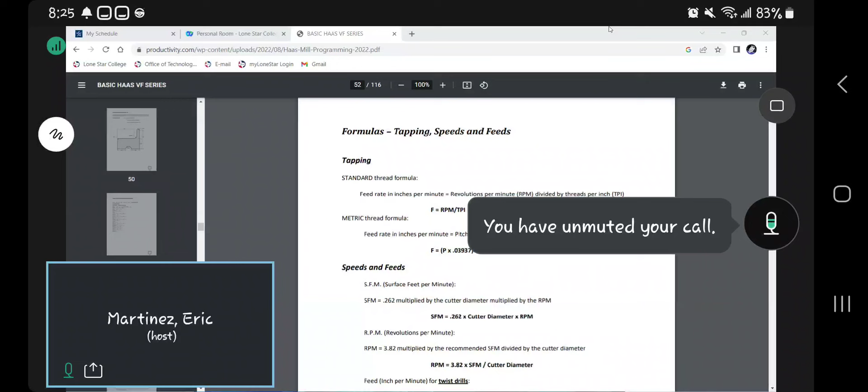It's a lot of information to get absorbed in what, 6 weeks? Yeah, it's bad enough, it's already 6 weeks. And then on top of that, we missed at least 3 or 4 days. So we lost almost a week with all the days off and unforeseen events and holidays. We had Juneteenth, 4th of July, we missed today, and we missed a day last week. We lost a whole week.

But it's all right though, because what do we do in bad situations? We adjust our fighting position and keep on moving, right? We just got to fire, keep on going.

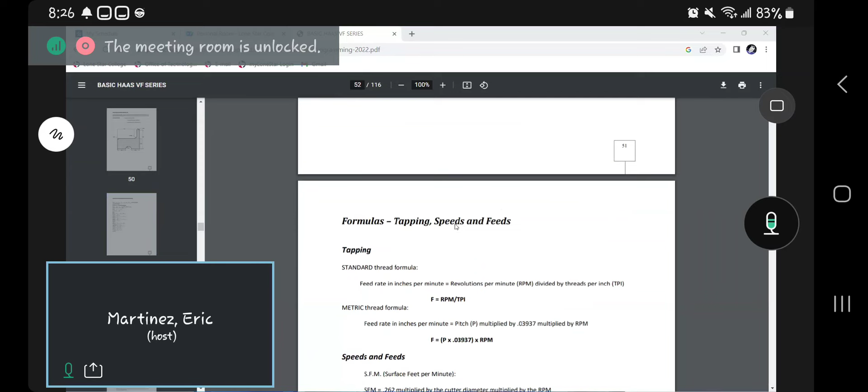All right, so on page 52 of the mill, if you don't have it opened up, open it up on your personal computer. We're gonna go to Haas productivity, and it's gonna be the one in the middle. It has to say basic up here on the top left. Basic Haas VF series. That's how we know we have the right one.

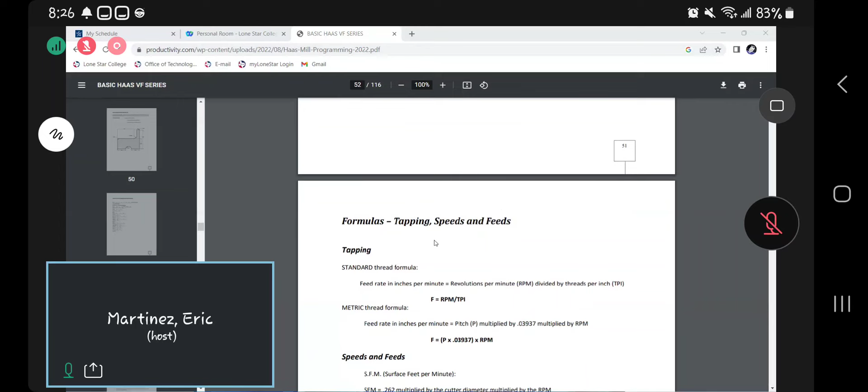Are we there? There.

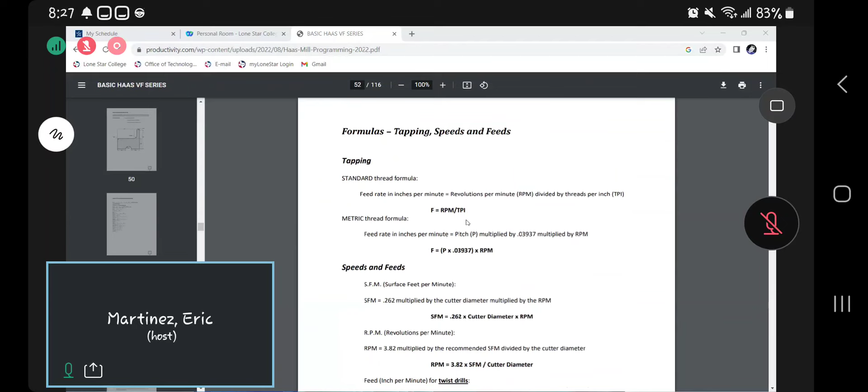Okay, so on this page 52, all right guys, we're supposed to know this information already from Basic Machine Shop, correct? Tapping, our feed rate equals our revolutions, RPM, divided by our TPI, correct? So that's our feed rate. So we got to figure out our RPMs first, correct? And then we got to figure out TPI. How do we figure out TPI?

How do we figure out TPI? Man, I can't see you, so I can't call on you or pick on you. Should be on the print. Okay, hold on, you're confusing yourselves.

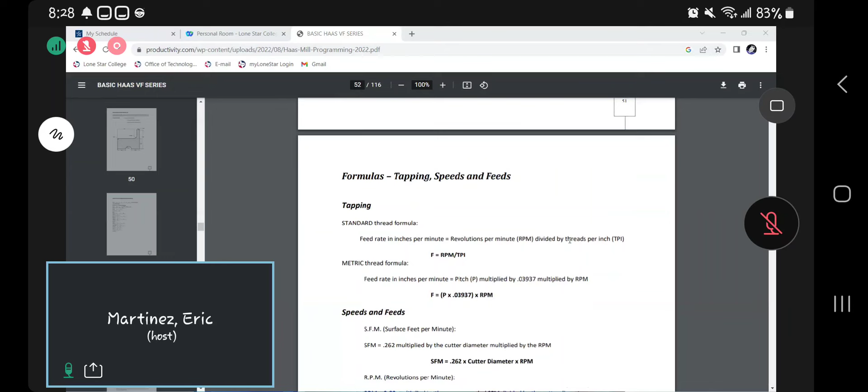All right, so if we got 8 TPI, correct? 8 threads per inch, 1 divided by 8, that would give you your TPI. So the RPMs divided by your TPI, our speeds and feeds, right?

So our SFM is our surface feet per minute. That depends on what material we have, correct? Are we dealing with stainless steel? Are we dealing with titanium? And then what type of insert are we using, or what type of end mill? Are we using a carbide end mill? Are we using high-speed steel, correct? So we figure out our surface feet per minute.

So our surface feet per minute, right here would say if it's 0.262 times your cutter diameter times your RPMs. But that's for SFM. So if we have our SFM, though, and want to figure out our RPM, it's the same formula as we learned from basic. 3.82 stays as a constant, correct? 3.82 times your surface feet per minute divided by your cutter diameter.

So if we're facing on that Haas, it's 3 inches, correct? Because we have a 3-inch face mill, right? So 3.82 times surface feet per minute - like we said, our surface feet per minute all depends on what material we're cutting and what inserts we're using, for example of the face mill - and then divided by 3.

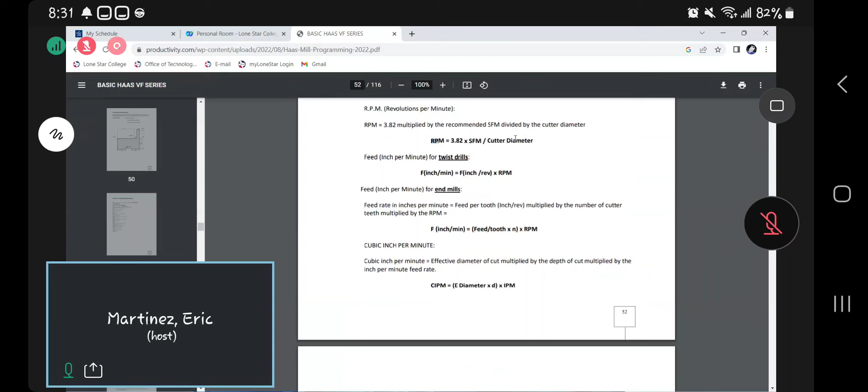So this is the feed per tooth, it's gonna say like feed per tooth, 0.003, 0.002, those type of numbers, right? That's what you're gonna get on the identification of the tool, divided by the tooth. So if I'm using a face mill, I have 8 teeth on there, right, because I have 8 inserts. You divide it amongst each other, then you multiply it times your RPM that you got up here, correct? And then that's how you figure out your feed.

All right, drilling and tapping and boring canned cycles. This is basically just explaining how canned cycles helps you produce less G code than what you would line by line. Does that make sense? So for example, if I wanted to peck...

And just look at my mouse real quick. If I came over here and started pecking down, right? If I'm doing peck, that means you go in and then you come back out. You go in and you come back out. What are some of the reasons do you guys think that you want to use pecking?

Your harder metals need to remove some chips. Why? While you're drilling and the chips stay down there, those excess chips create friction. That friction creates heat, correct?

If you're not using coolant, or if your coolant isn't strong enough and you're going to town at it, you could weld your end mill to your actual part.

So pecking allows the drill to come out of the hole, so coolant goes in there, and then the shavings get pushed out, but it also cools the hole while the drill is coming out. Plus, with your drill coming back up, it doesn't have as much friction. It has like a little pause through the friction.

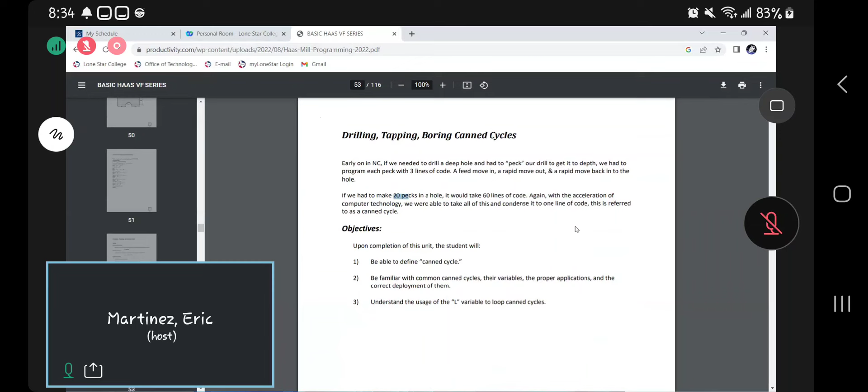That's what it's saying right here - it would take 60 lines of code if you only had 20 pecks. So if we're doing a big massive part that's long, and that hole is 5 inches deep, how long would that program be? Pretty long, right? So we're gonna learn what canned cycles do, and we're gonna understand the value of L also.

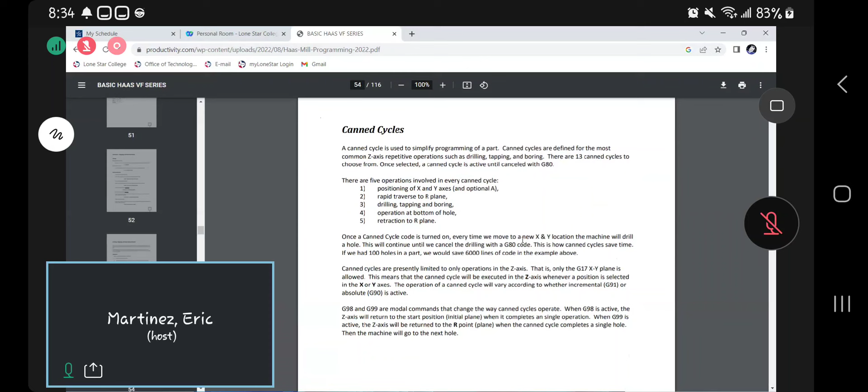So canned cycles - I could read this and you guys could be like, what did you just read? Or I could just explain it to you.

So there are 5 operations: positioning of X and Y - we know what that is, the X and Y plane. Rapid traverse, R - R means after you drill, you come back up to your R plane, your clearance. Most cases, it's 100 thousandths. So you drill, then clearance back up to 100 thousandths, correct?

Then we're gonna drill, tap, bore - an operation on the bottom of the hole - and then the R is gonna retract to that plane again.

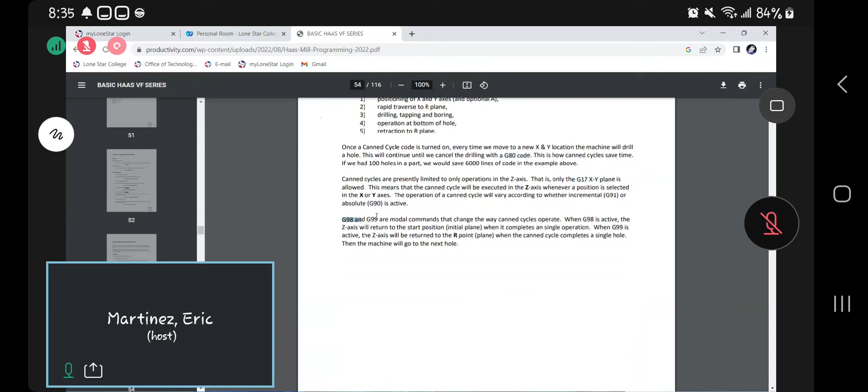All right, so we're still working on a G17 X and Y plane. A G80 will cancel your canned cycle. We're not gonna go over G80, G98, or G99 really, because it's just gonna confuse you a little bit more.

So these are your canned cycles used on the VF series of the mill. We have G73, G74, G76, G77, G81, G82, G83, G84, G85, G86, G87, G88, and G89.

So if we look over here, here's what it actually does. A G73 is a high-speed pecking drill. A G74 is a left-handed tap. G76 is fine boring, G77 is back boring. G81 is spot drilling, G82 is counter boring. G83 is peck drilling, G84 is a tapping cycle.

G85 is boring - all of these say boring, but some of these boring cycles bore down, stop, then wrap it up, or they start at the bottom and work their way up. That's why we have so many boring cycles.

Now, we're just gonna go over the ones that we really use in the shop - the ones that are gonna be your bread and butter. Obviously, we have about 12 or 15 of these, but if we spend time going through every single one, we're gonna waste a whole day just learning what they do versus how they work.

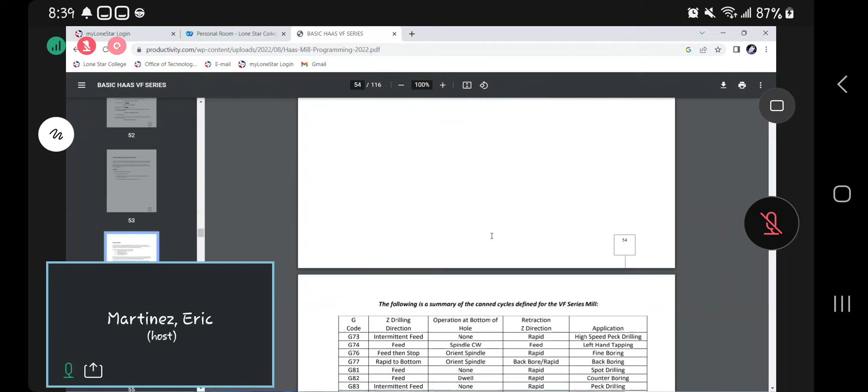Does that make sense? All right, so G80 is to cancel your canned cycle. In addition to this, a G00 or G01 code can also cancel any canned cycle. So I know a lot of you are going to read that and say, well, I just got to put a G00 or G01 in, it's going to cancel it. Yes, it is. But normally, if you use any type of canned cycle, anything between a G73 to a G89, at the end of your program you want to have a G80, so that you're telling the computer, hey, I'm canceling this, I'm done, don't use it anymore.

This is the way it's used out there in the industry. I know a lot of you are reading the book and thinking you could do this or that, trying to find shortcuts. But the way I'm teaching you is the way you're going to see it out there in the industry, and most of these guys are used to running code like that for years. So if you try those little shortcuts that are meaningful but not that meaningful, and you try to break the cycle of what everybody's been doing for so many years just because you figured it out on your own, no, don't waste your time on doing those little things.

Waste your time more on focusing how to do it correctly, because we saw how our test went yesterday. So the way I'm showing you guys, it works, it's functional, and it's fast. If there's a faster way to do it, you're only going to shave not even 1 or 2 seconds, but you might confuse yourself even more than it helps you. So the way I'm showing you how to program this layout, please learn it that way, because this is the way you're going to use it out there in the real world if you work for a machine shop.

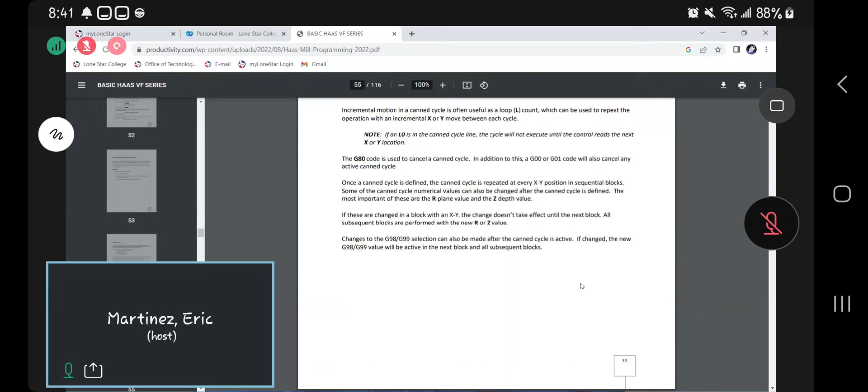All right, so now, as we said before, the R is going to bring you back to your plane, and your Z is going to be your Z depth value. So a G80 cancels your canned cycle. So we're going to start right now with a simple program. Is everybody good? Is everybody tracking?

Okay, yep, I know I'm going a little bit fast, guys, but hopefully we're recording this and you guys could watch it again if you didn't understand something. Be writing down.

What happened? Yeah, so Corey's recording, guys. So if this doesn't upload, if I say, hey, I'm sorry, I don't know what happened, it didn't upload, just send Corey an email. And Corey, please check your emails or get in touch with somebody that has Corey's number and ask him if he could send you that. Pay him through PayPal, Zelle. Pretty sure he takes his OnlyFans pages, whatever. So, no, do not put this on YouTube.

Okay, so we're going to go ahead and do the G81 canned cycle. This is a straight drilling, guys, with no peck at all, just drills going down and then comes back up. That's it. You could use this canned cycle, it's modal. What does modal mean? Modal means once I identify this line, the G81, all I have to do is put a different point value, and it's going to continue doing that can cycle. Does that make sense?

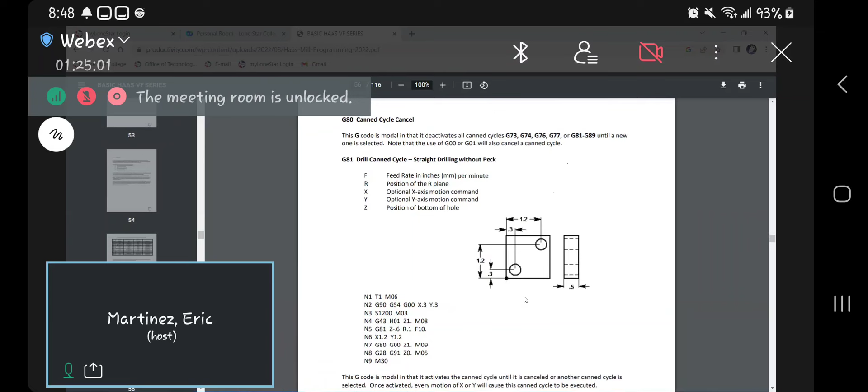All right, so we went down to Z negative 0.6, right? We retracted back up 100 thousandths, correct? Now this is what it means by modal.

My next line, I just have to put my next hole's points in the coordinate system. That's it. So I have to tell it X 1.2, right, Y 1.2. So when it gets down here, it's gonna move to that location. And guess what, guys? It's gonna do this again.

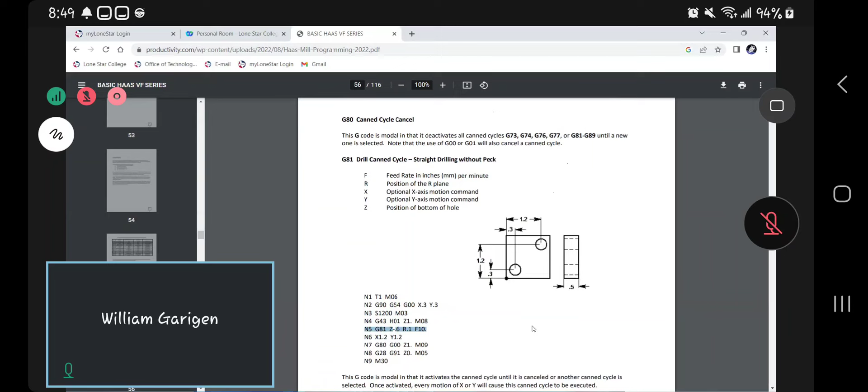Does that make sense? So that G81 line is what's telling when you go down to the next block, the X 1.2, telling it what to do when it gets there. Yeah, that's what they mean by modal. Got it. So instead of you having to write that whole code again in a separate block or anything else, all you have to do is give it the points.

Now, it has its pros and it has its cons, right? Pro is if you have multiple holes, all you have to do is put multiple points, and it's gonna drill them to that Z specification. But that's also the con.

If you have the same hole and the same drill diameter, but you have different Z depths, it's not going to work because you're only giving it one Z depth here. Does that make sense? Because the programming always goes back to the last G code, right? It comes back up to this one, yes. So your canned cycle, whatever point you put down here, it's going to come back up to this canned cycle, until you tell it, hey, that's it, no more, by giving it a G80.

We tracking? Yeah. Let's say there's one here and one here, right?

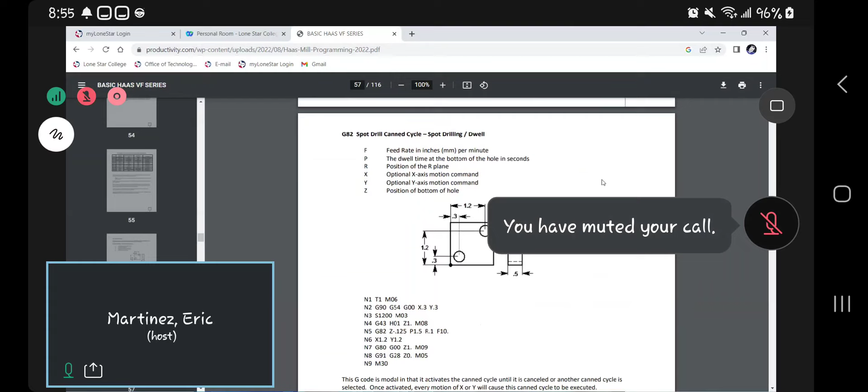Okay, so a G82, very similar to a G81, but it's called a spot drill canned cycle. So what's the difference between this one and the straight drill? What's one of the things you guys see different? Look at the program. What do y'all see different?

G82 code. Yeah, so obviously, guys, and a feed rate, yeah, they're not gonna make two codes that do the same exact thing, right? So the difference between the G81 and the G82 is this P value.

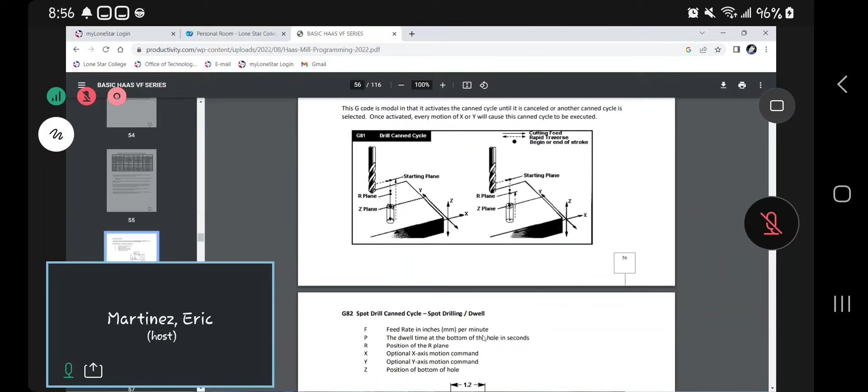You guys see that? Up here, we don't have a P. Yeah, I see that, P1.5. Yeah, but down here we have a P. So what does a P do? Well, right here it explains it, right? The dwell time at the bottom of the hole in seconds, right? So what does that mean?

If I'm spot drilling, just imagine on the manual mill, guys. If I'm spot drilling so I could put a bigger drill in and make a bigger hole afterwards, correct? If I just push down on the Z lever and go down, and as soon as I hit my Z point, I'll pop it right back up. What could happen with that hole? It's gonna leave like a line, right? Because I came off of it abruptly.

So the drill wasn't able to turn all the way with the two flutes that it has, so it left a line in one of them. So what happens on the side of the walls? It left a line. So what happens when your drill comes in? If it catches that line and puts it on a slight angle while we're drilling down a hole, it's going to end up walking, correct?

So what does a G82 do? It gives you dwell time, so it stays down there a few seconds and cleans up those walls smoothly. Does that make sense? So that way, when that drill comes in, there is no line, there is no burr, there's nothing on the walls, and it catches straight on the angles that the spot drill made. So the angles of the drill are going to land right on them also, and that way you have less chance or risk of your drill walking on you. Does that make sense?

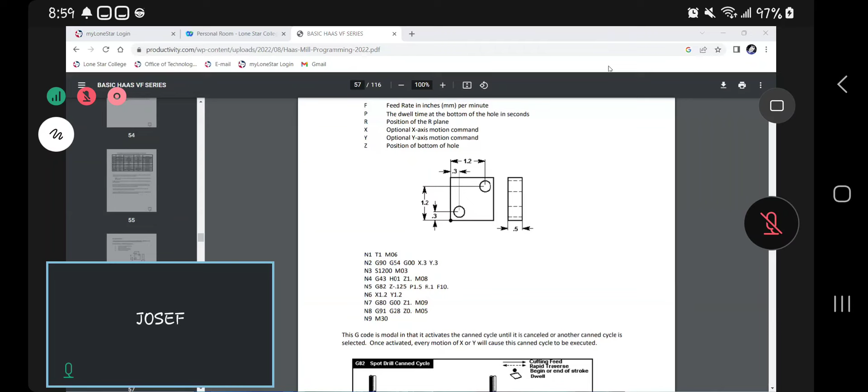You guys see that? Yes, sir. We have a problem with the connector. Huh? Boy, I tell you, man. Hey, text him and tell him - let him call and I will help you to connect. Huh? What did you say, Josef? I'll call him and I will help him connect to the meeting. Boy, he better go to church this weekend, that's all I gotta say. He was already there, so he knows how to connect. Yeah, he came in and left. I think he thought, oh man, maybe if I go on he's not going to notice. Hey, somebody text him and tell him to get back on. All right.

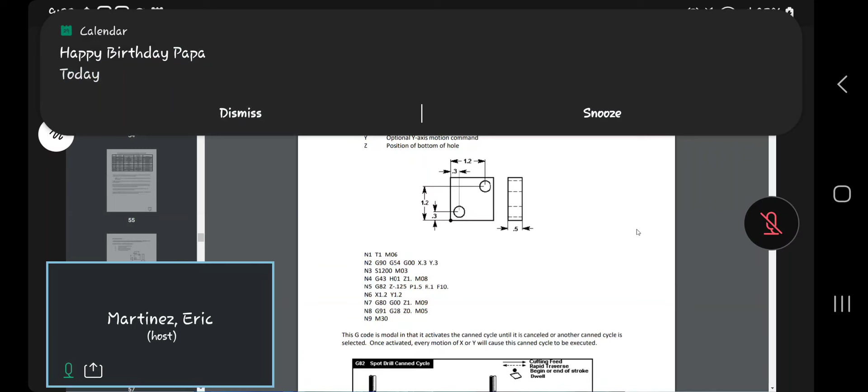So we look at this code, guys, right? Learning how to write code, the best way to do it is to understand it, to understand what we're doing when we're writing the code. That's the best way. It's not by remembering exactly what letter we put where or anything like that. No, it's understanding the process. That's the best way to understand it.

So we have a tool number - obviously we need to have a tool number, correct? Then we have an M06, we need to have a tool change. Obviously, guys, by the time we get to drilling, we've already faced the part minimum, so we're not going to use that 3-inch face mill to drill a hole. If you do, you're drilling a big ass hole - you're drilling a 3-inch hole minimum. So that's why we still put those M06s on, so a T1 M06, right?

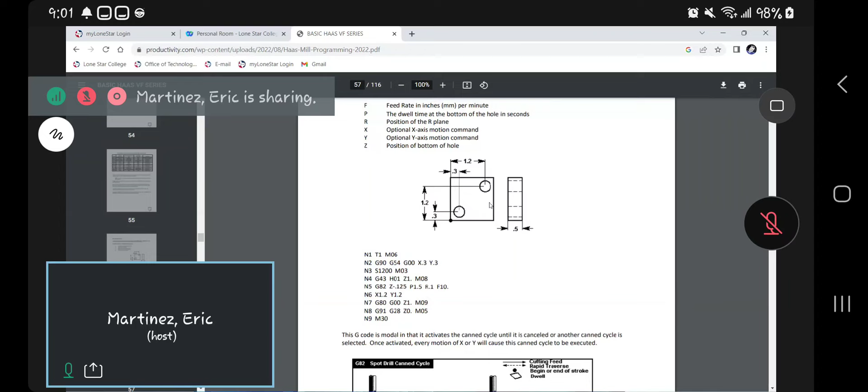So we got our G90 - this is the mill, guys, we need to tell it whether it's absolute or incremental, correct? Then we have our G54. We've established our G54 either before or after we wrote the program, but we need to establish our G54 before we run our part. Like I said, for your test, I don't care if you write the program first, I don't care if you touch off X or Y zero first, but as long as you do it before you run the program, you're good. This isn't my way or the highway, no, it's what works, correct? So we have our G90, our G54, our G00.

We're coming to the first hole right here: X.3, Y.3, correct? So right now we're hovering above our first hole. Our Z should still be all the way up. Then we start our spindle at 1200, M03. We make sure the actual computer knows the tool length, so we give it the G43, which always pairs with your H, and that H has to match up with your tool number. Then we have a Z that goes down to 1 inch above the part. Obviously we were under G00 before, so it's still going to rapid to this position, correct?

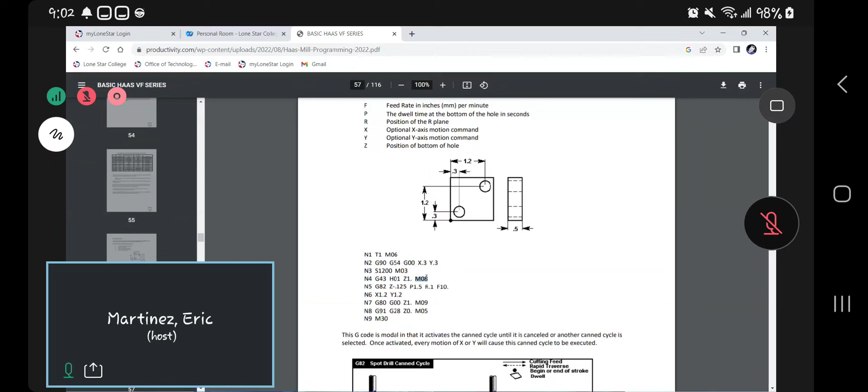So then we had on our coolant, but we're not going to do that ourselves, right? With this G82 canned cycle, you don't need a G01. Does that make sense? That canned cycle tells it that it's going to be a linear cut, so you don't need to put, obviously you don't see a G01 here, Z negative, whatever. We have a G82.

So it's a G82, which is a spot drill canned cycle. We're going to a depth of 125 thousandths. If you guys remember from Basic Machine Shop, whenever you had your countersink drill, it looked like it went down, then had a sharp point, then came up, and had an angle on it. You need to make sure it goes down at least to the angle. If we were in class, I would have drawn this on the board, but we got to work with what we have. That's how we know how deep we're going with the spot drill.

Now, spot drills come in different sizes. They come in different numbers: 1, 2, 3, 4, 5, 6. The higher the number, the bigger the spot drill. So in this case, we're going 125 thousandths into the part, so it's Z negative 125.

Then we have our P value. That P value leaves it down there for a second and a half, cleaning up the walls, then it goes back up to R.1. Your feed rate is 10 inches per minute. After it does that, it's going to go to your next hole on X 1.2, Y 1.2, and it's going to repeat this process again because it's modal, correct?

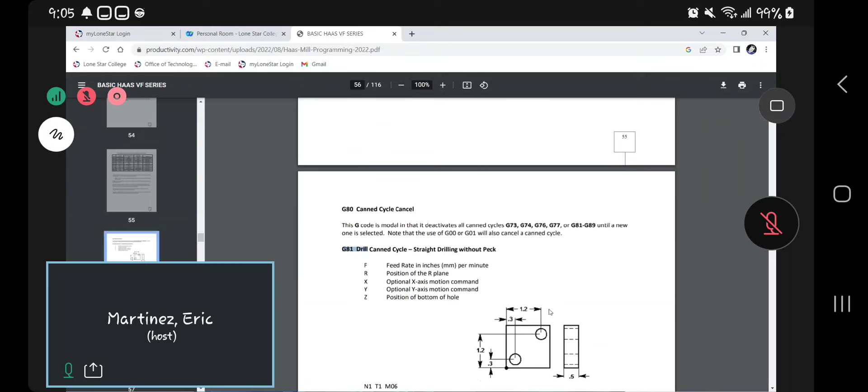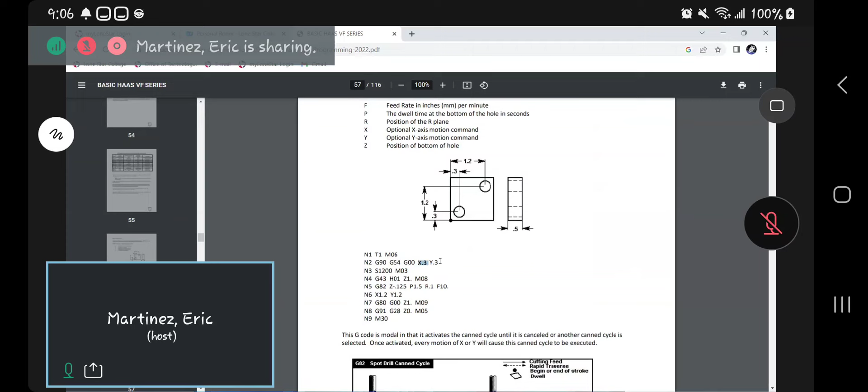Does that make sense? We could copy and paste this all day long, but as we mentioned yesterday, if I copy and paste this, go through the whole program again and understand what numbers you got to change. So if I made this first and then I wanted to come back and just drill, most likely if I copy this program, so it could be the next operation. For my next operation, I'm going to have to change my tool number, I'm going to have to change the T. This X.3, Y.3 is going to stay the same because I just spot drilled those holes.

So now I'm going to come in with the drill and drill those holes. So that's going to remain the same. If I work out my math, I figure out my speed. I need my G43. I need to change that H to whatever tool number I have in the machine now. If it's tool number 2, fine. That H needs to match that T though, so that would be T2, H2. I still need to come an inch above the part.

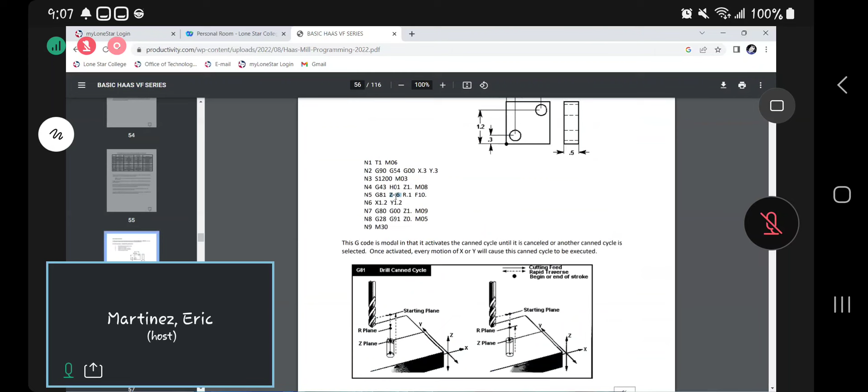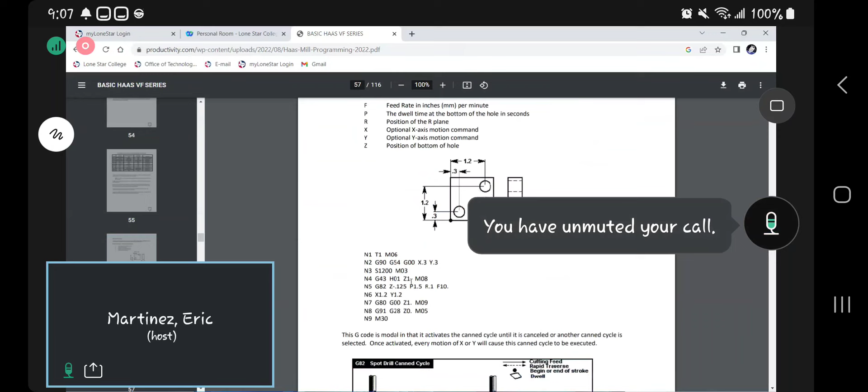And now this G82, I'm going to change that to a G81, correct? And then I will change this Z depth value to whatever I'm drilling at. So let's just say in this case, I was drilling to a Z negative 0.6. The P, well, we have a P value here, but we don't have one up here. So what would I do? I would just delete the P. And then the R stays the same, feed rate stays the same, next point stays the same.

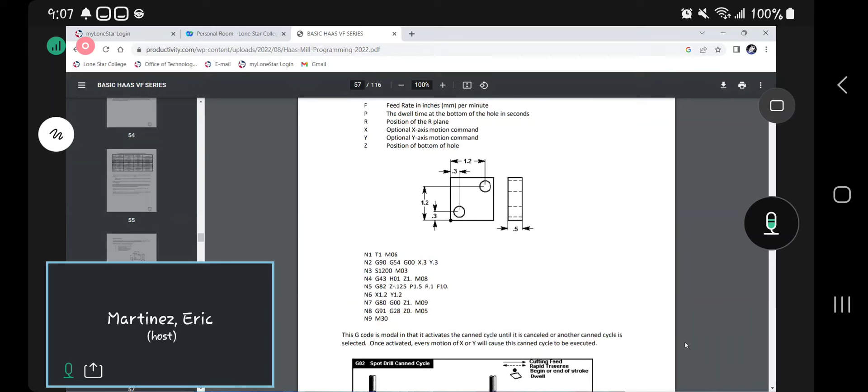I still cancel my canned cycle, so everything else remains the same. Does that make sense? Because 9 times out of 10, like this one has, sometimes you don't need a dwell. If you don't need a dwell, why are you going to dwell? You get what I'm saying?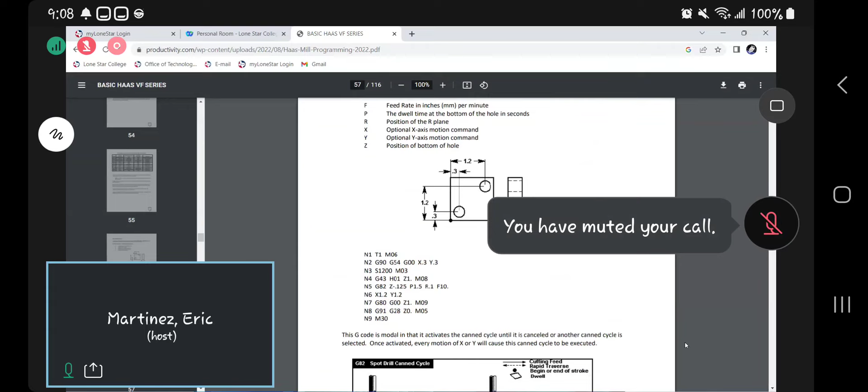So normally, if you got a through hole, there is no dwelling because you went through the part. So if you're drilling a hole to tap, you're not going to tap all the way to that point because that drill is going to go past where your threads need to be at. So there's no reason to dwell on the bottom of a hole for a tap. Now this is just for, let's say for example, spot drilling. For spot drilling, you want to dwell, because you're going to make that little spot for the drill to go into. Does that make sense?

No, because even if I'm drilling a blind hole and I'm threading it afterwards, and it's blind, I don't need a dwell for a spot drill because the drill goes past where your threads are going to be. So that screw is, yeah, it's just if you need to clean up the lines, you're going to use a G82. Think about it that way. So for another example, you could use this G82 for counterbores and countersinks, right?

So if you have an end mill and you're doing a counterbore and you wanted to sit there and clean up, you'd use a G82, correct?

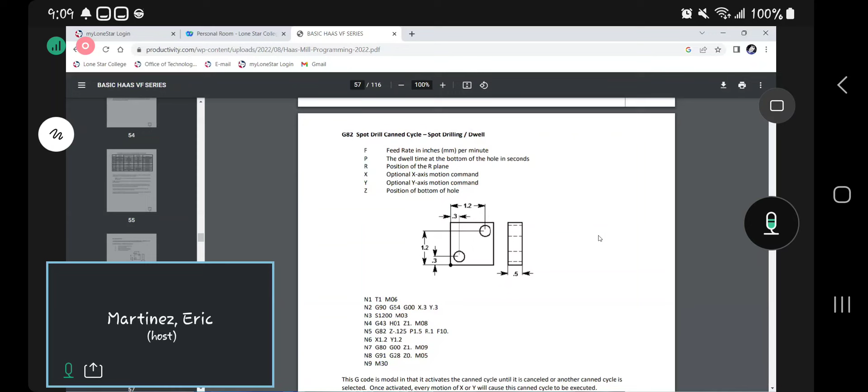So we just need to know what application we're doing and which canned cycle to involve it in. That's all it is, guys. It just needs to make sense. Not like the Army anymore. If it makes sense, go with it. All right? We're good?

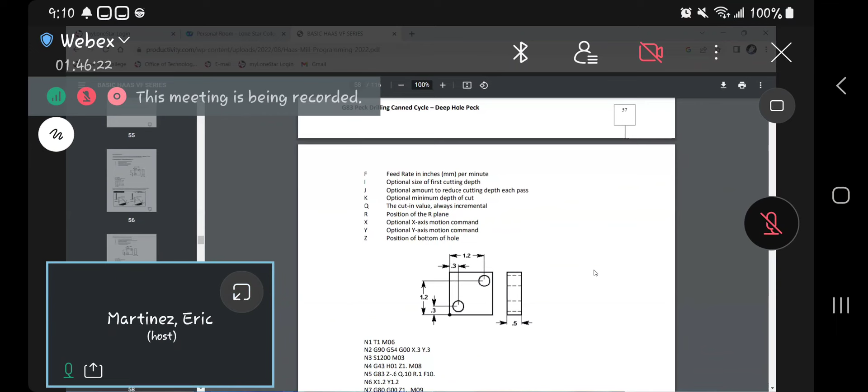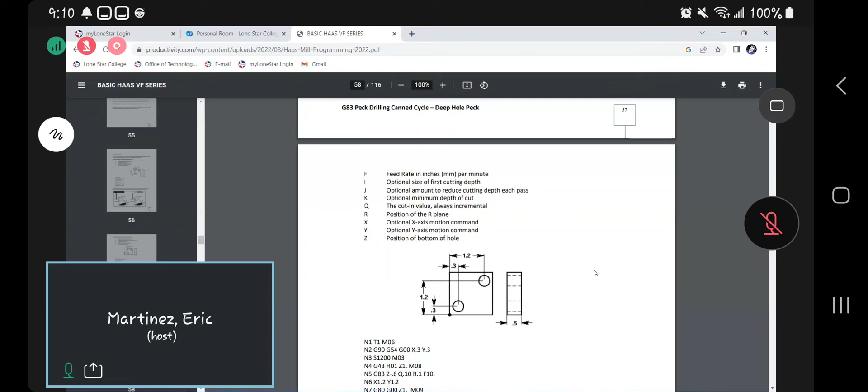Okay, a G83. This is the one most commonly used at a shop, because a lot of times we're drilling quite a ways down, even if the hole isn't a big diameter. Even if it's a small drill, even a quarter, sometimes it's better to peck because you don't want to break that drill. Because what happens when you break that drill? You got to replace it, right? And hopefully you didn't break it in the hole, because if you broke it inside the material, now you got some other stuff to worry about. So a G83 is used to save tool life, but also to save your company time and eliminate the risk of your drill breaking inside the part. So your G83 is kind of like your bread and butter when it comes to drilling. Every shop I've worked at, we've always used the G83 for one application or another.

Have we used a G81? Yes. Have we used a G82? Yes. But a large percent of the time, you're going to be using a G83, right?

So the F is still your feed rate, correct? Your I is the optional size for your first cutting depth. Your J is the optional amount to reduce cutting depth per pass. Your K is the optional minimum depth of cut. The Q is a cut-in value and it's always incremental. R is the position of the R plane. X, Y, and Z, you guys already know what that is, right?

Most of the time, you're not going to use I, J, or K. You're just going to use Q. But they want you to know that I, J, and K are available. So let's say I was cutting some type of material that's very gummy. When I first drill, I need to get under it. I can't just skim 10 thousandths, because then it's going to gum up the material and it's not going to make my hole a perfect circle. So I might want to use I and go into the part more than the rest of it. Does that make sense? I'd want to establish that circle first.

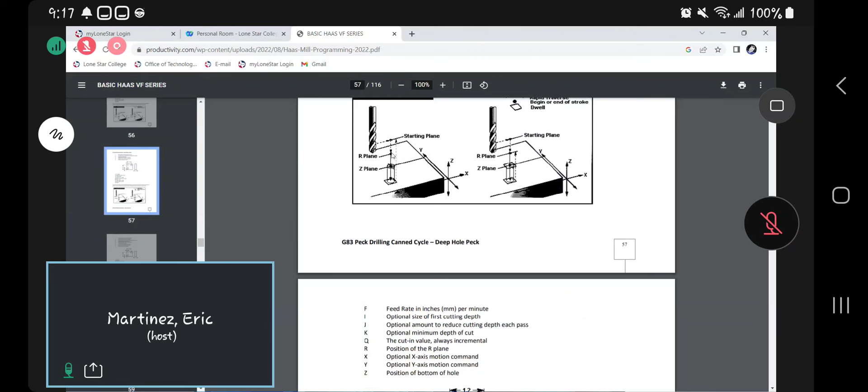R 0.1, so what is this saying? With your Q, you're going to go in 100 thousandths, come back up 100 thousandths. Next, go in 200 thousandths, come back up 100 thousandths. Next drop to 300 thousandths, come back up 100 thousandths. Next drop to 400 thousandths, come back up 100 thousandths. Then drop to 500 thousandths, come back up 100 thousandths. Then drop to 600 thousandths, then come back up to 100 thousandths. Does that make sense, guys?

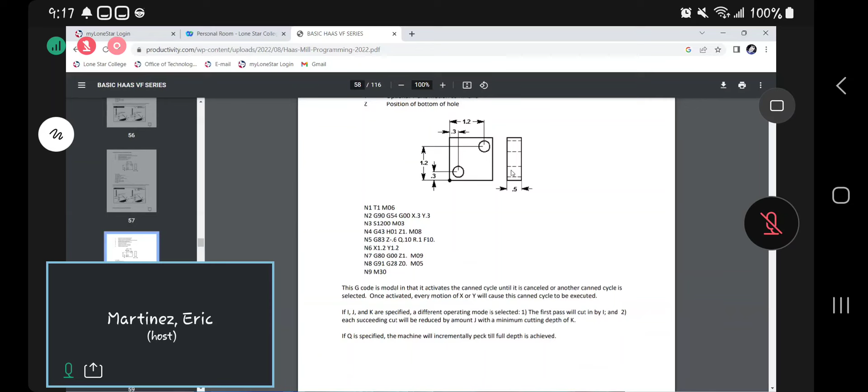So just imagine everything I just said was a line. You're going in 100 thousandths, Z minus 0.1. Coming back up 100 thousandths, G00, Z 0.1. Coming back in 100 thousandths, G01, Z negative 0.2. Then come back up 100 thousandths, G00, Z 0.1. Then go back in, G01, Z negative 0.3. Does that make sense? How much line of code would I have versus just having this?

9 lines, guys. 9. And I could drill up to however long that drill is. I could drill 3 feet if I wanted to with this line of code. Does that make sense?

Got it? Are we tracking?

I mean, you guys gotta understand how cool this is. It saves you time.

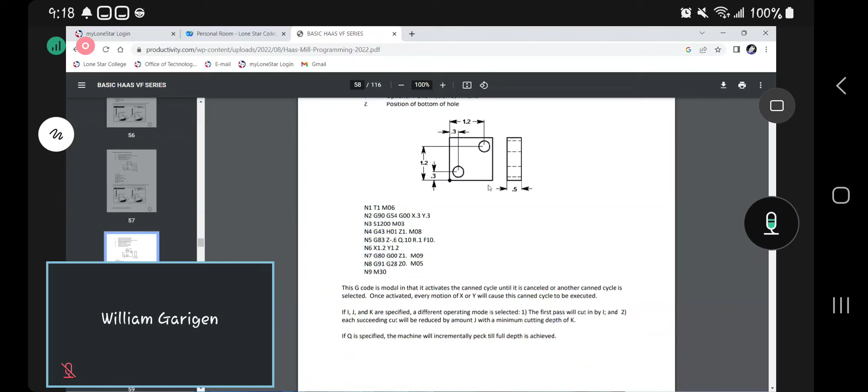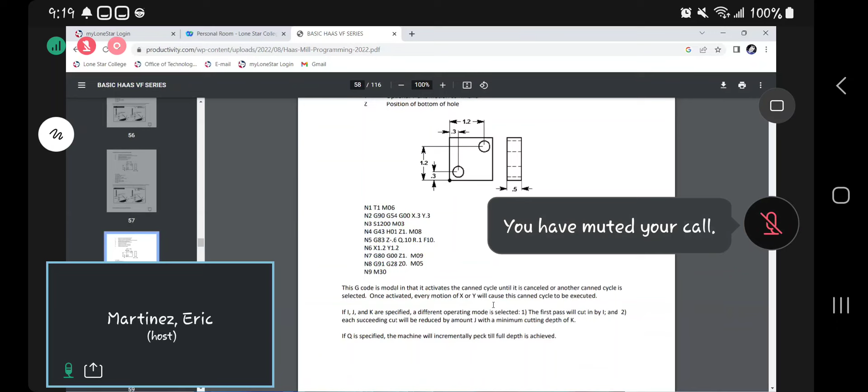Okay, because if everybody's asking me, I'm gonna go open up a beer then. This is my weekend already. We're all sleeping, huh? I know V's just logged on and he's like, I'm here. V, let me hear your voice, V. Yo. What happened, V? I don't want to answer you. I'll just be quiet and talk to you on Monday. Hopefully you'll forget. All right.

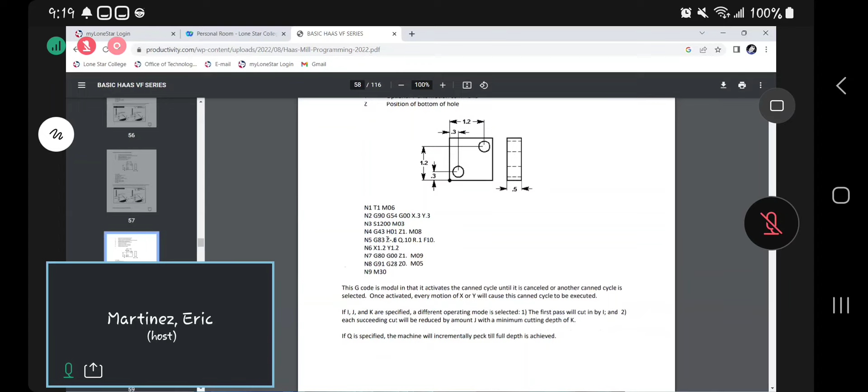So we understand though, the G83 canned cycle, right? Just 9 lines, guys, 9. And if you had more holes, all you had to do is input the points. That's it. If this was 30 inches you were drilling, Z negative 30, that's all you had to do. So this is a big, big time saver, right?

So this is an exercise. I want to leave this for homework for you guys. Page 60 and 61. Y'all want me to print it out for you?

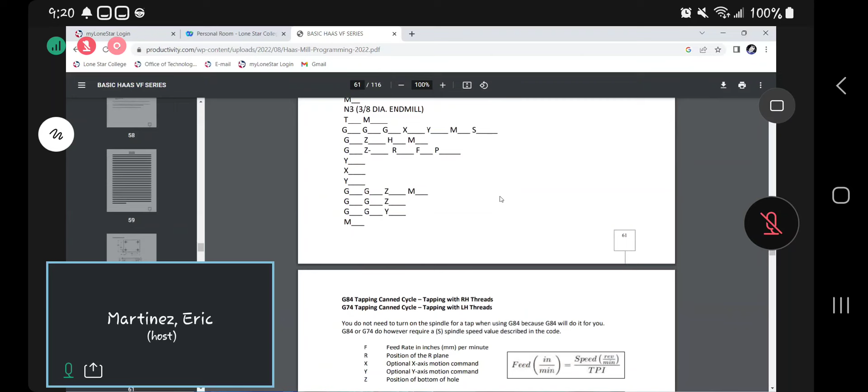So make sure you do this. If you have Adobe Reader, download both of these pages and just put it on there. If you got a printer, just print it out. If you don't have a printer, bring out a piece of paper, go old school, write down all those G codes and everything, write the code down, right?

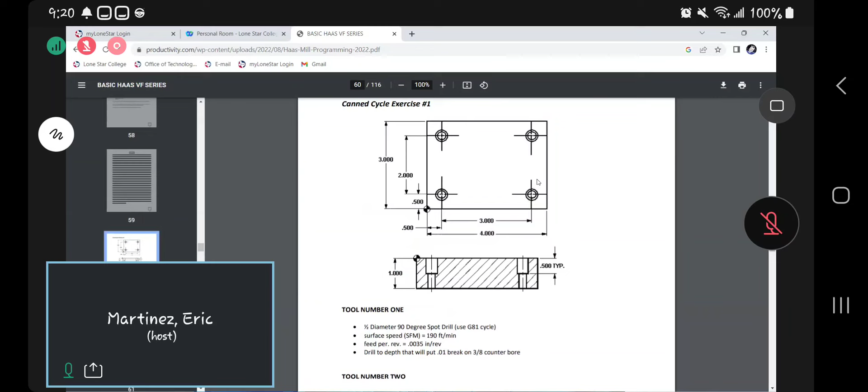So your next test, your final test, you're still gonna have a facing operation, you're still gonna have a profile operation, and now you're gonna have drilled holes in there also. So the more we practice this, the better we're gonna be, right?

Here go all your canned cycles, guys. I mean, they just laid it out for you. This obviously you know is your safety line, right? What are these gonna be? G00, G53, Z0, right? We're making sure we're on the top. Over here it says T. T what? Well, right here it says tool number 1. It's a 1/2-inch diameter, 90-degree spot drill, correct? It's giving me my surface speed, right? It's giving me my feed per revolution, correct?

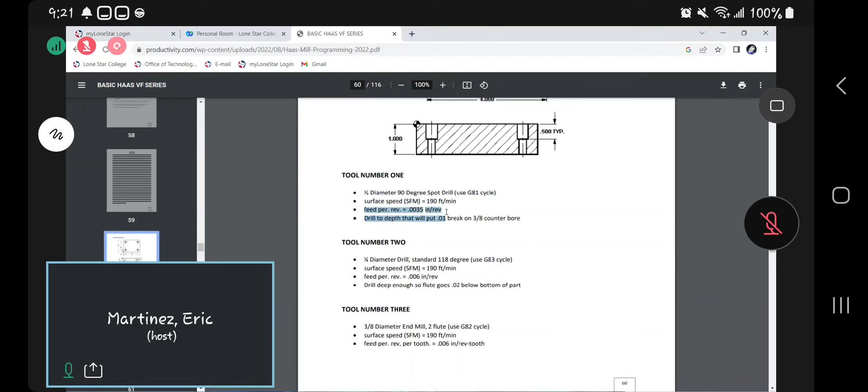Why do I need that information? Well, we go up to what we learned on the first page, that little review that we did. Look at that, right? All I have to do is plug in those numbers, correct? Plug in those numbers, guys, that's all you have to do.

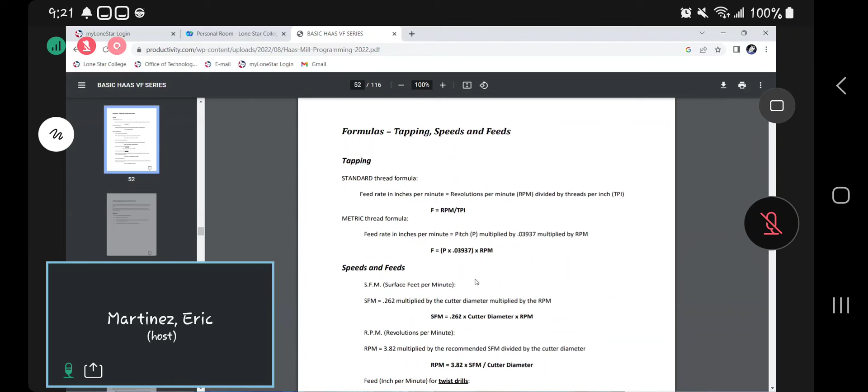Make sure that you understand your feeds and your speeds. I don't want to hear, oh, well, I just put 30 for feed. That's a good feed, right? You know what look you're gonna get if you ask me that question. You already know, right? This exercise, you guys have the whole weekend to work on this, so this should be filled out. Right, V?

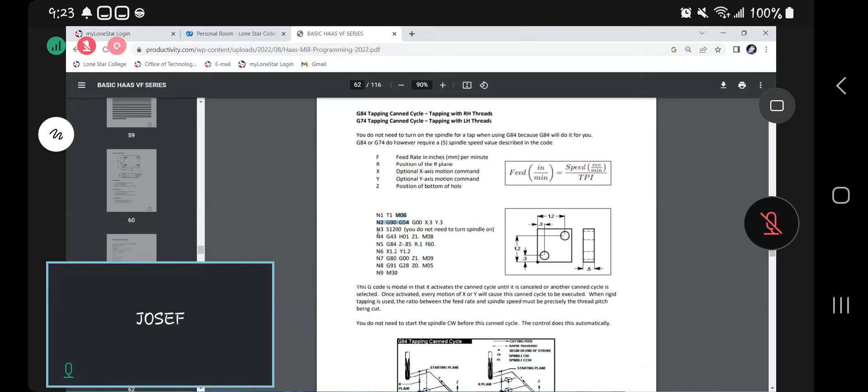We have, what's our tool number today? Huh, no quema today. We have our tool number. We have our M06, G90, G54, G00, X.3, Y.3.

Notice, guys, that if we're going to use a G84 or a G74, we don't need to give it a direction on M03. This is the only time you don't have to. Do this while you're doing a facing or a profiling, you're breaking your tool. Why? Because your spindle's not spinning, right? But you're going to give it your RPM, and we figured out RPM by our formula, correct?

So now, by it reading this G84 or this G74, it's going to know which direction to turn. Does that make sense? That's why you don't need an M03 here, because obviously a G84 is going to turn clockwise and the G74 is going to turn counterclockwise.

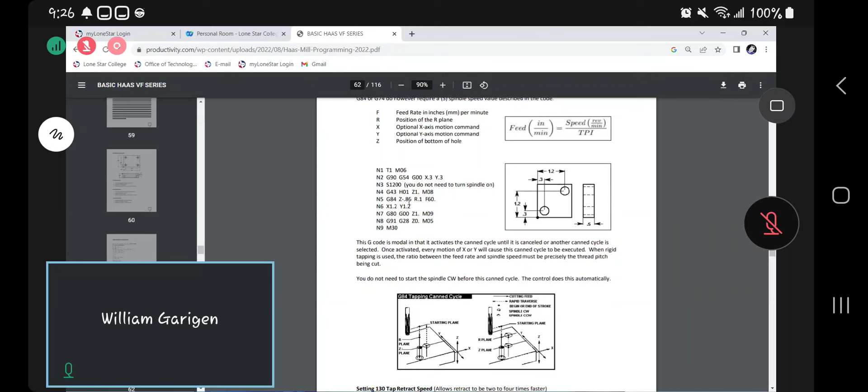So at the top it says Z position at the bottom of the hole. So Z will always be the depth of the hole. Yeah, so you're going down 850 thousandths.

So right there, you're going to be 1 inch above the part, right? Then it's going to read that R.1, so it's going to come right here, 100 thousandths on top of the part. Then it's going to read that Z negative 0.85, and it's going to read that G84. So the spindle's not even on yet. Here, it's going to turn on, go down 850, reverse, back up to 0.1. That's what it's doing right there.

Then, since you have another hole location here, it's going to come over here to this location and do the same thing over again.

So after that, of course, we have to cancel our canned cycle, correct? So we have a G80, G00, Z positive 1, M09 turns off for coolant, G00, G53, Z0, G00, G53, Y0, M30.

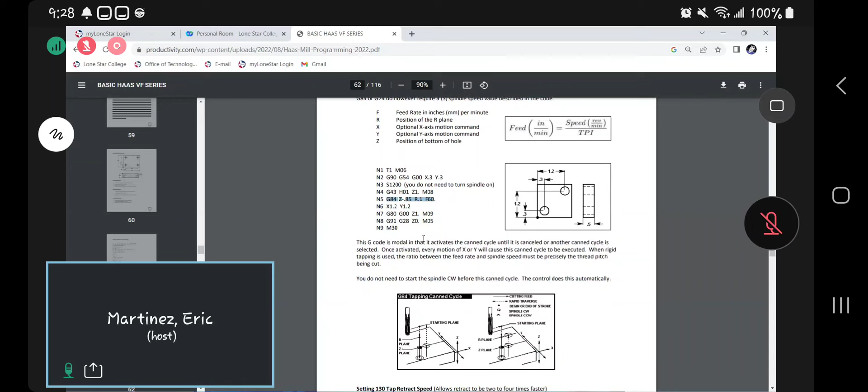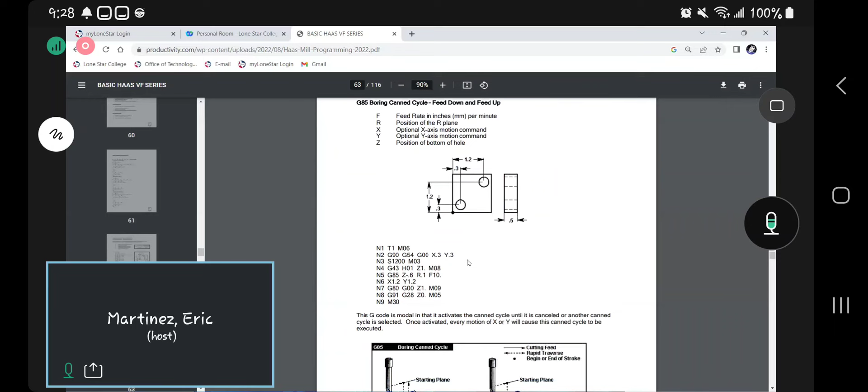How many of you guys thought threading was going to be harder than this on the mill? No? I thought it was going to be easier? Okay, cool.

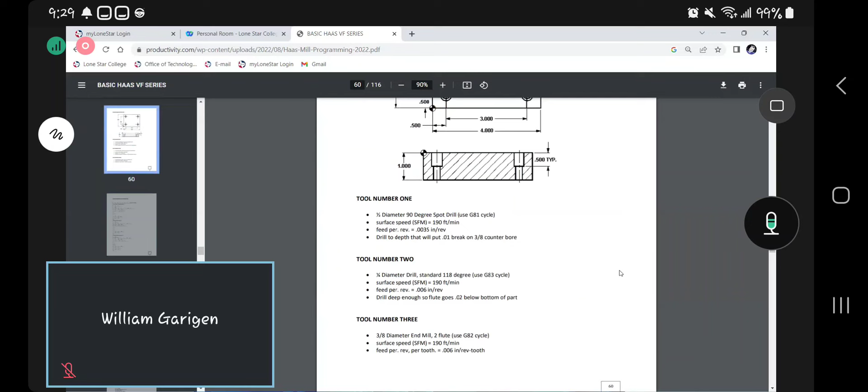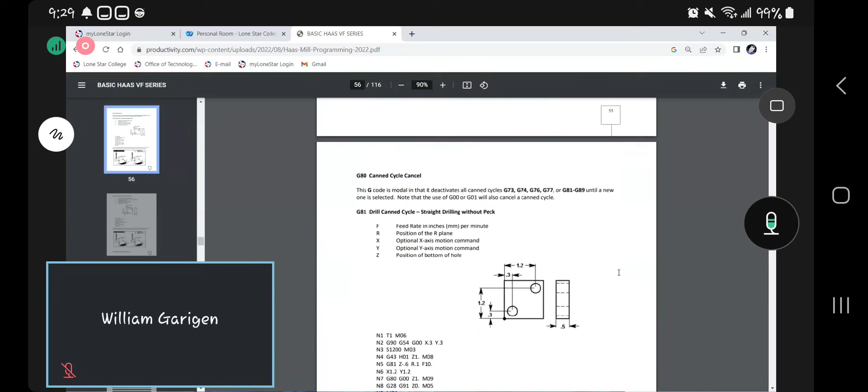All right, well, we'll do this because that is better explained in person. But like I said earlier, guys, if you guys went over that in basic, look how much time we have left.

And we're already crunched for time. It kind of irks the instructors when we have to go back and learn a lesson we should have learned already. You get what I'm saying? Because now we're wasting more time on that. I'm ready to jump on the lathe now and teach you guys how to drill holes on the lathe. If I have to go back to explaining this, something you guys should already know, something you guys should already be tested on, it takes up a lot more time. Does that make sense?

So do this - I know in your basic book there's a page that has those formulas, right? I think I left my book in the office, so I don't have it with me right now. But there's a page for the mill that has the feeds, the speeds, everything on it.

Make that part of your homework too, so you can figure out your numbers. And then when we show up in class, we'll do it together, because we have a perfect example too - the homework I gave you guys. So you guys have it right here.

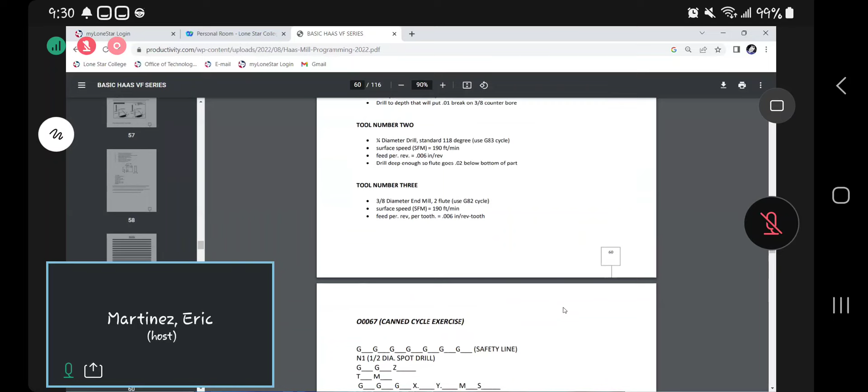It gives you your surface feet per minute. That one is questionable because sometimes the book doesn't identify the material, or it doesn't identify high-speed steel or carbide, but it's giving it to you right there, along with your feed per revolution. Does that make sense? So trust me, open up your basic book, look at those problems, understand it, then substitute these numbers for those numbers, and you're gonna get it. Does that make sense?

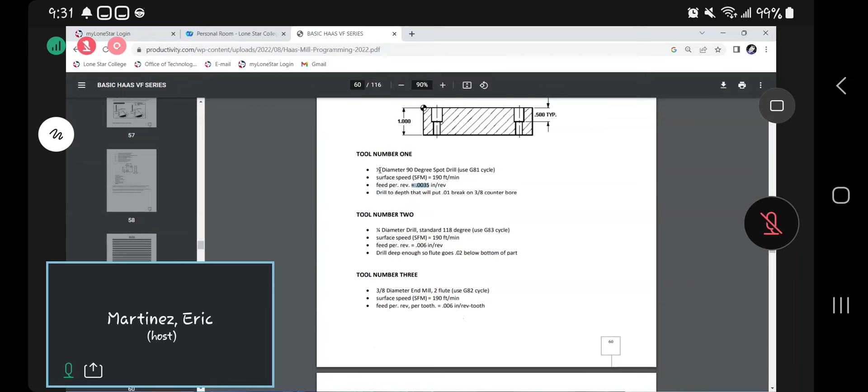No, the one you took in basic machine shop, that precision book, the big blue one - there's a page on the mill, and there's examples there. It shows you exactly how to get it, and it breaks down the problems like you're saying right now.

Because that's what I'm gonna do - I'm gonna take that book, and we're gonna go through a problem in the book, then reference these numbers. You guys could do it yourselves, it's not that hard. I get what you're saying, I want to double check my answers and everything.

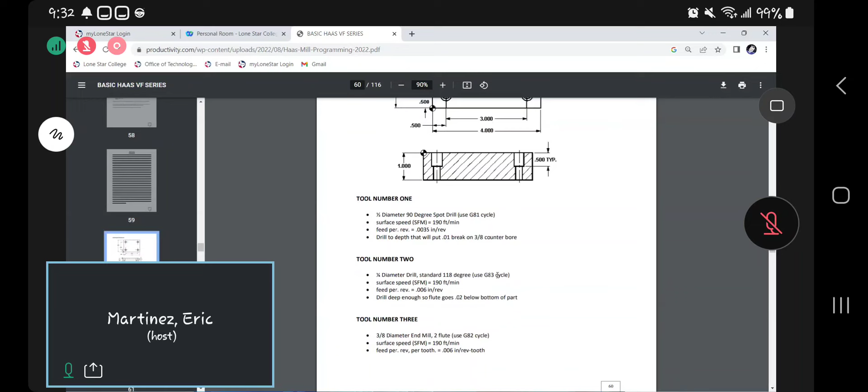But I could be teaching you how to drill on the lathe right now - how many of you guys have done that yet? None, right? And that's one of the ops that we need to go through, and it's one I want to go through before we leave, because it's a G83.

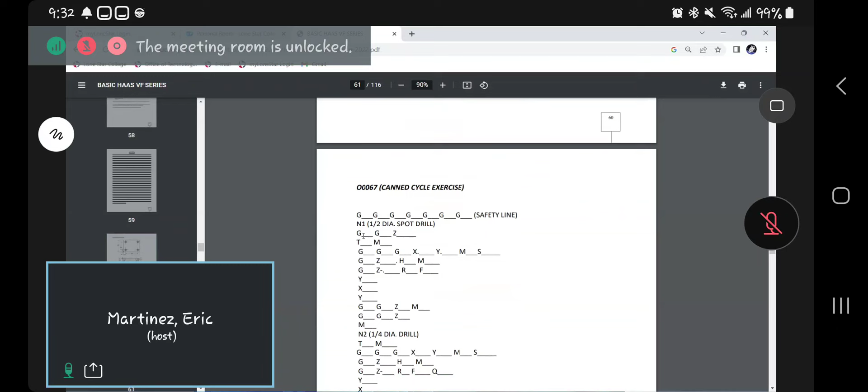Same thing that we went through here, so we can reference it. That way it's not like, oh, I'm gonna teach you grooves and then OD threads, then I'm gonna teach you how to drill. No, I want to do it on the same day because your mind's already thinking right now what a G83 is, how a G83 works. So if we go over the lathe side, you're gonna understand it better today than if we wait until Monday to go over it. Does that make sense?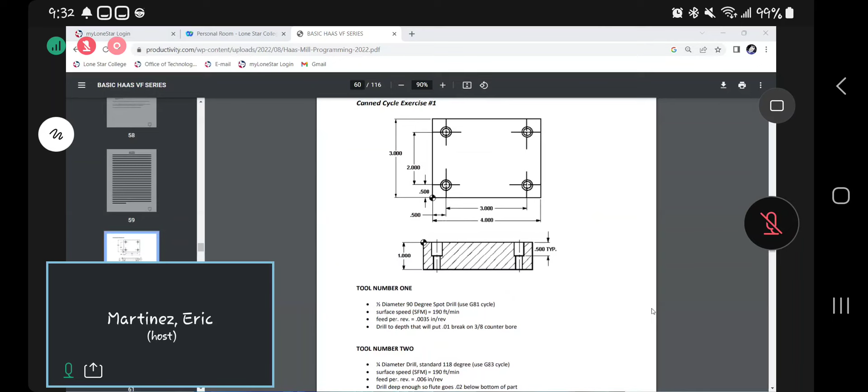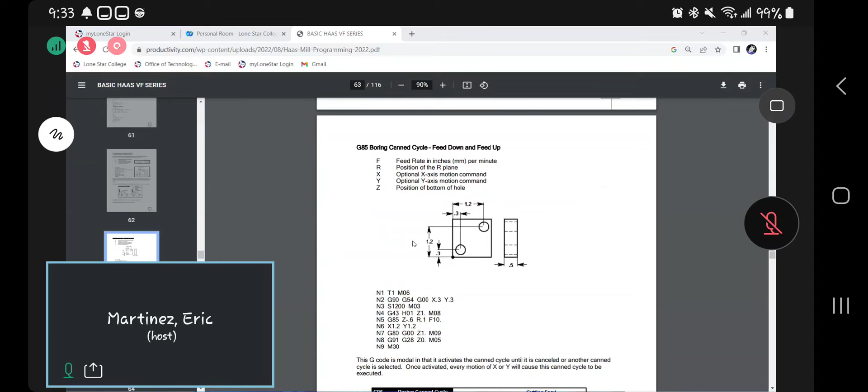All right, so for right now, guys, everything else is the boring bar. Really, we don't bore too much on the lathe. There's a video that I might look up and then show you guys.

Yeah, my fault, my fault - yeah, I meant the mill. There's a video on that shows you how to bore on the mill. So what it is, it's a tool that comes down and sticks out, and that's your boring bar. But on top of the tool, you have a little measurement dial that you increase or decrease so you can get the exact hole size that you want.

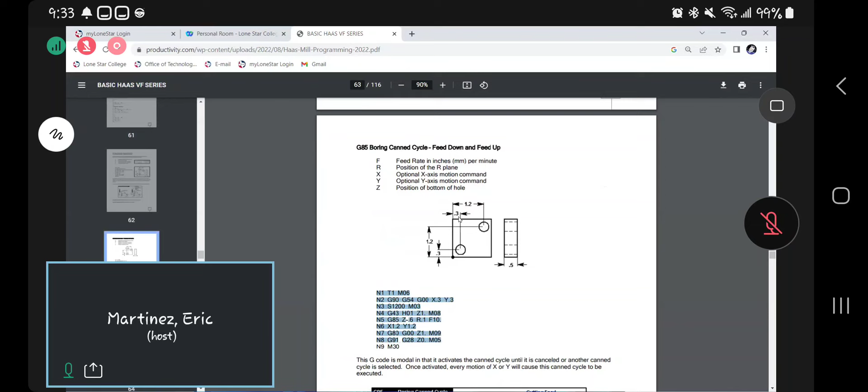So if you look at the program, it's near the same thing - you're just boring down there, and that precise hole is all going to depend on how much you open up the dial or close that dial. I'm going to try to find that program on YouTube, and I'm going to send it to you.

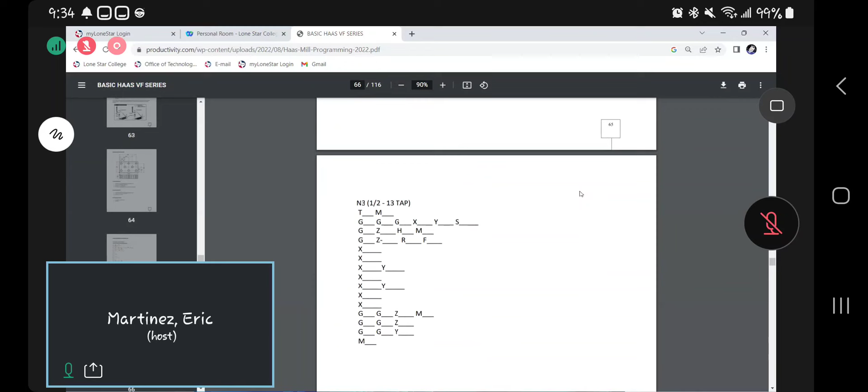If you guys get to it, do number 64 also if y'all want more training. If y'all finish the other one and feel comfortable with it, do that one. A lot of these other pecking drills and everything like that, same concept, just different codes.

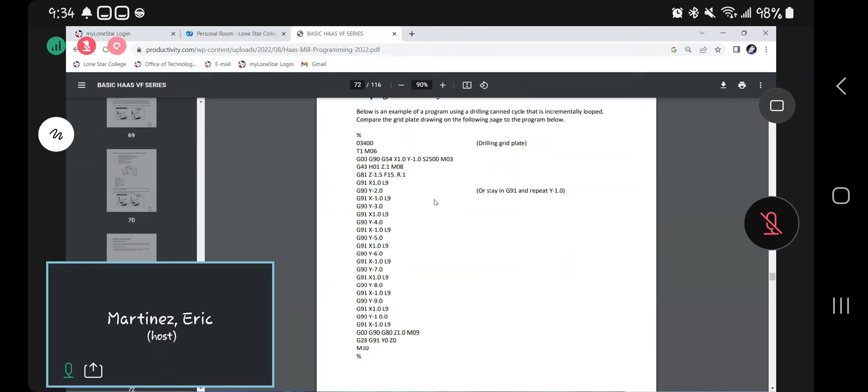And for the mill, I think we're gonna stop there because that's about an hour and a half of material. This is gonna be easy to understand once we understand the holes - it's gonna be too easy because we already have an understanding of the holes, but I would go ahead and let you know what the L does afterwards, like the loops. And trust me, once you guys know what the loops are, it's gonna be a lot faster and easier to understand.

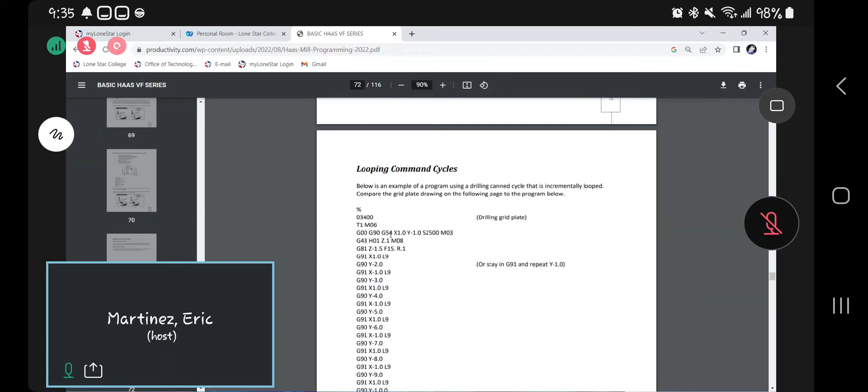Hold on, somebody's in my front yard.

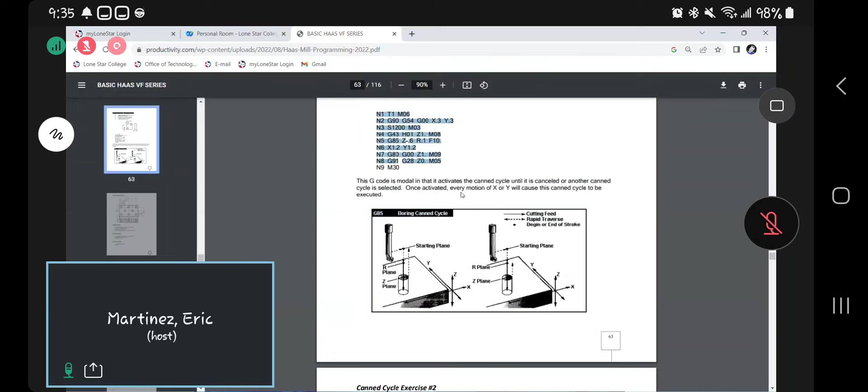But I want to show you guys the actual drilling canned cycles on the mill in person before we go over the loops, because the loops is just what we learn, but pretty much a little bit more advanced. So I want you guys to see this in person, the basics down first, and then we'll learn the more advanced parts. All right, so let's go into the lathe.